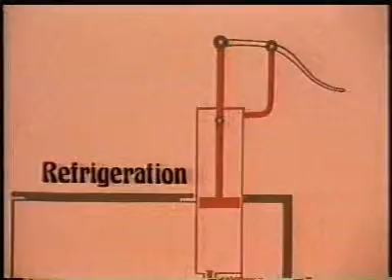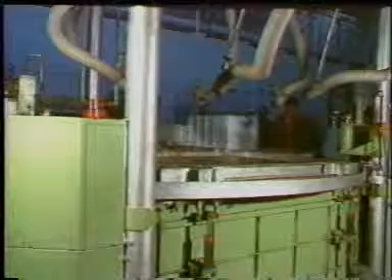Jacob Perkins was a pioneer in the development of refrigerators. In the year 1834, a British patent was registered in the name of Jacob Perkins for production of artificial ice. Initially, a hand-operated refrigeration system with condenser was developed. Later on, the development of high-speed electric motors and compressors paved the way for the modern domestic refrigerators.

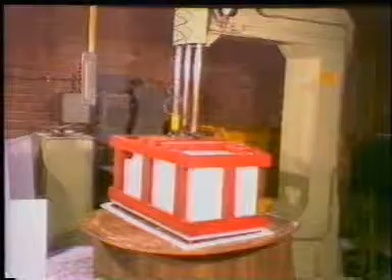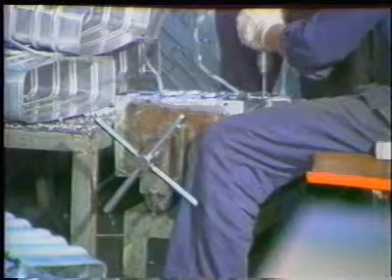The manufacturing of refrigerators involves the production of a series of assemblies such as compressor, evaporator, condenser, cabinet, and the door panel.

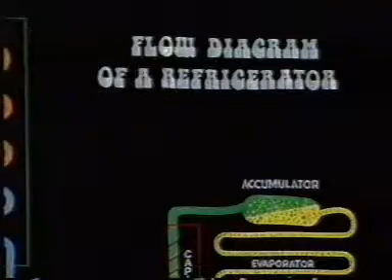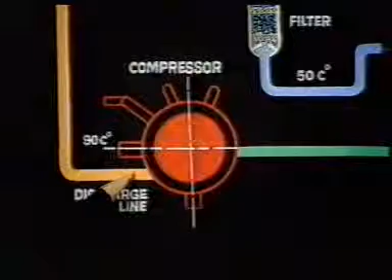The principle of working of a domestic refrigerator can be explained with the help of a flow diagram. As the refrigerator is switched on, the compressor starts working and the vapor of the refrigerant gets compressed and heated, and the refrigerant vapors are pushed through the discharge pipe.

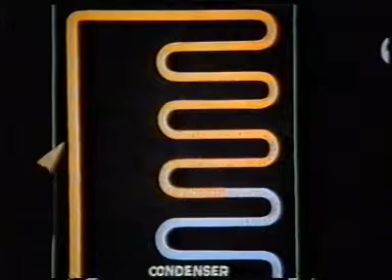The refrigerant vapors slowly reach the condenser. The condenser is a coil of metal tubing which is exposed to atmospheric air. The air surrounding the coils of the condenser absorbs the heat from the vapor, and the vapor condenses to a cool liquid refrigerant.

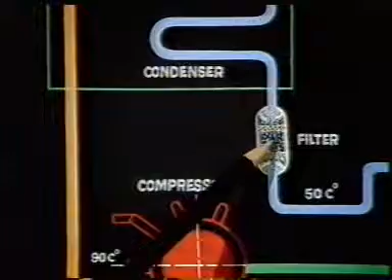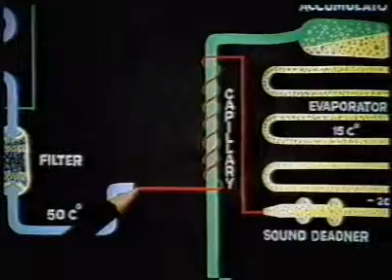The liquid refrigerant then passes through a filter dryer, and the liquid refrigerant is fed into a capillary tube. The capillary tube is a thin tube with very small cross-sectional area, and this constricts the flow of refrigerant passing through it. When the refrigerant fluid passes through the capillary tube, the fluid pressure drops and the refrigerant enters the evaporator at a low pressure and low temperature.

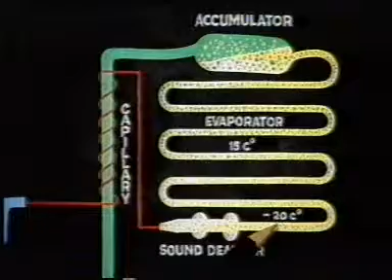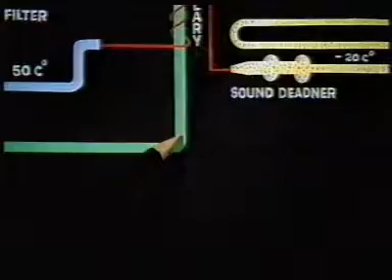The liquid refrigerant boils when it passes through the evaporator coils, taking the heat from the cabinet space where food items are stored. The liquid refrigerant at low temperature and at low pressure enters an accumulator. From the accumulator only, the vapors at low pressure enter the compressor for starting another refrigeration cycle.

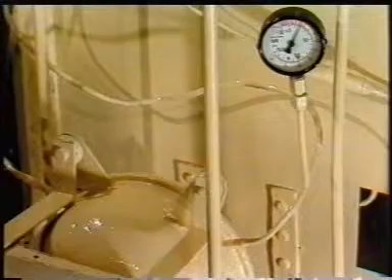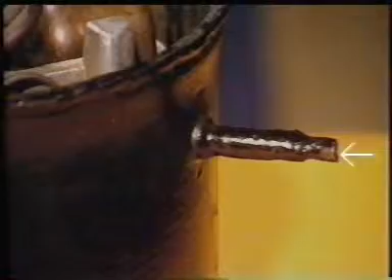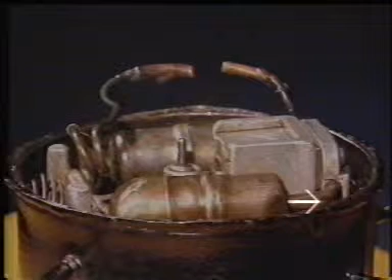The compressor is the heart of the refrigerator, and it is totally enclosed and hermetically sealed when fitted in a refrigerator. One can trace the flow of the refrigerant vapor from the inlet to the outlet of the compressor.

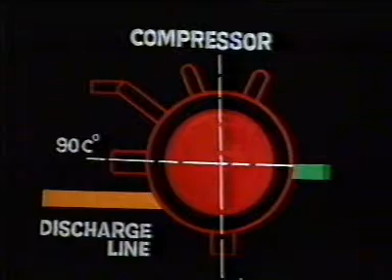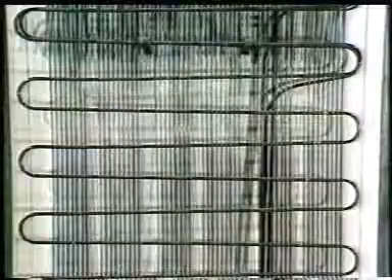The condenser is a coil of metal tubing, normally of 6 to 8 millimeter in diameter and about 10 meters in length, fixed onto a plate mounted at the rear side of the refrigerator. It helps to dissipate the heat from the high pressure and high temperature refrigerant vapors, thus condensing the vapors to a liquid form.

Filter is used at the end of the condenser to separate dust particles. Silica gel kept in the filter also ensures that moisture and water vapors are removed before the refrigerant enters evaporator coils.

The capillary tube is a thin tube with very small cross-sectional area, and this constricts the flow of refrigerant passing through it.

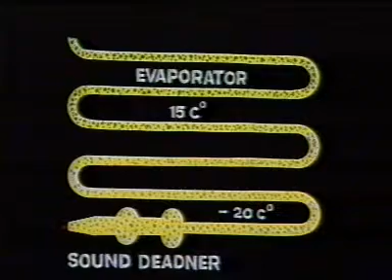Evaporator coils are kept inside the freezer in the top portion of the cabinet. Maximum cooling occurs at the freezer compartment.

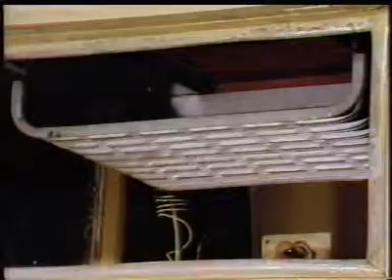Evaporator coils carry the volatile refrigerant fluid, and the heat inside the cabinet space makes the refrigerant fluid boil, and in this process, heat is extracted from the space surrounding the evaporator coils.

The accumulator is in fact a safety device which traps the liquid refrigerant and ensures that no liquid can go into the compressor and damage it. The accumulator ensures that only vapors are allowed into the compressor.

Thermostat fitted inside the cabinet ensures that desired temperature, that is more cooling or less cooling as the case may be, is maintained in the cabinet space. Compressor, condenser, filter, and capillary tube are mounted outside the cabinet. Evaporator coils and thermostat are housed inside the cabinet.

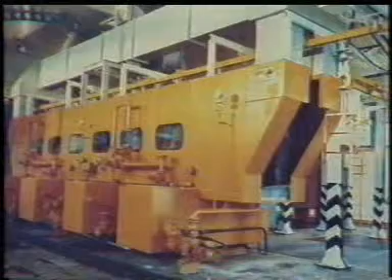Cabinet is made of 20 gauge low carbon steel sheet or galvanized sheet. These are decoratively spray painted to avoid chipping and corrosion and dried up in baking ovens.

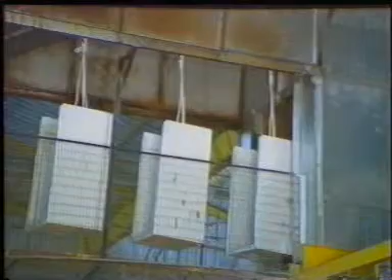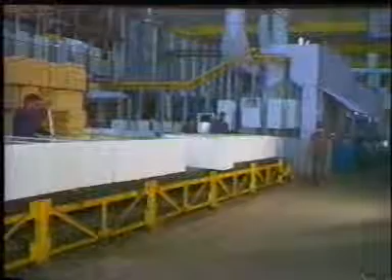The cabinet is insulated by using resin impregnated fiberglass or mineral glass wool, or sometimes polyurethane foam insulation.

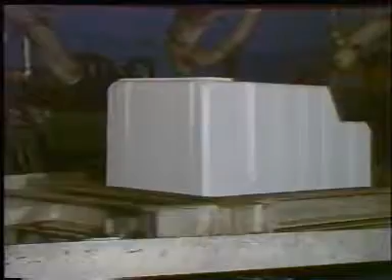The main liner and inner door liner are made of plastic material such as high impact polystyrene. The liners are made by vacuum forming process.

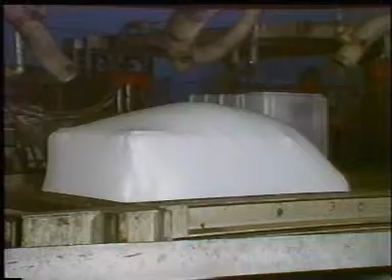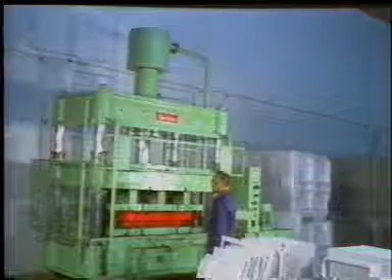Cabinet and door panels are manufactured in vertical hydraulic press. The door is also fitted with polyurethane foam insulation.

The cabinet and door panels are designed such that maximum volume for food storage is obtained with minimum floor space occupied by the refrigerator. For efficient operation and maintenance of refrigerators, certain simple guidelines are to be followed.

Defrost the refrigerator at least once a week by turning the thermostat knob to the defrosting position and keep the fridge on till the ice accumulated on the evaporator coils gets completely melted. This ensures better cooling of the cabinet space and higher efficiency.